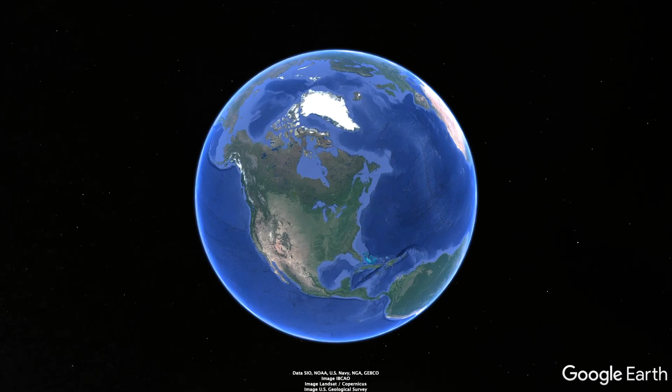I'm standing here today in Alberta's industrial heartland. This is just one of the many places across North America and globally where members of the Canadian Crude Quality Technical Association operate. I'm Dave Murray, Secretary of the CCQTA and Principal Consultant at Omnicon Consultants. Today we're going to take a brief look at the evolution of the CCQTA from its inception into what it is today.

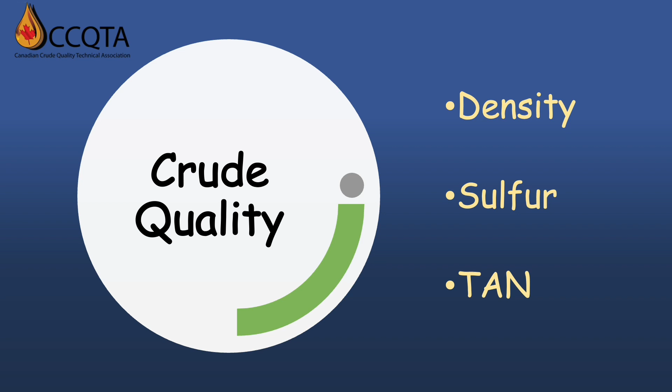Before I get too much further, I should briefly talk about what I mean by crude oil quality. The term crude oil quality likely has many definitions depending on where you are in the crude oil production, transportation, refining, and/or purchasing chain. Three crude oil quality parameters are generally used to determine the value of a crude oil. These are density, sulfur, and TAN, or total acid number. Historically, it has been generally accepted that low sulfur, density and TAN crudes are easier to handle and/or refine, which implies good quality and good value.

Let's look at this from another direction. Broadly stated, quality is the degree to which a product or service meets the expectation of the end user. Processability is loosely defined as any aspect of the production, blending, storage, and/or transportation of crude oil which impacts product handling. In a more practical sense, it is associated with minor changes in crude oil composition, which could be insignificant to one sector, but potentially detrimental to another.

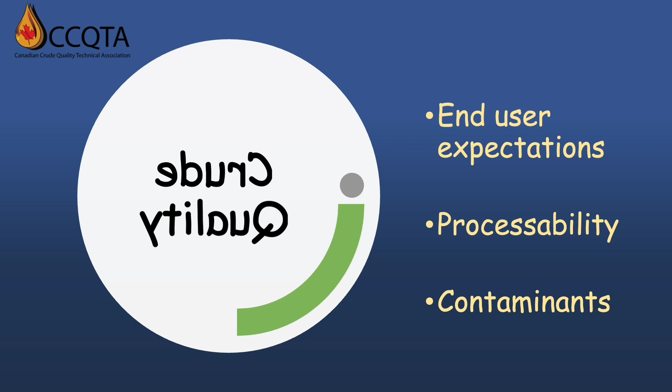Processability issues are often the result of trace-level contaminants of the crude composition. These tend to be relatively low concentration, but they build over time, often resulting in expensive remediation efforts. These contaminants are becoming more and more important in the crude selection process, and they're a key area of focus for the CCQTA.

What factors can impact crude oil processability? Each sector of the industry has their own goals and guidelines when it comes to crude oil handling. A producer will want to ensure that the product meets pipeline specifications. Next, the pipeline must be able to move the product without impacting pipeline integrity or infrastructure such as pumps, meters, and tanks. Unfortunately, some of the practices employed in one sector can have an unwanted effect on the downstream sectors.

For example, while the injection of additives can enhance production, it may also have a negative impact on the refinery receiving the product. Similarly, crude blending into pools can maximize tankage and pipeline utilization. However, some crudes are not compatible with one another, creating blend instability, which can upset or foul downstream units. Let's have a look at the various activities that can impact crude oil received at the refinery.

The first link in the chain is production. Changes in production methods, such as changing from primary to secondary recovery using enhanced oil recovery techniques like CO2 injection, or introduction of new production techniques such as SAGD and/or solvent enhancement. Also, the use of new additives or changes in chemistries and/or the concentration of existing chemistries in use. Also, slop management methods, like is slop being injected back into the sales quality product?

Then we move on to blending. Blending is often done to meet or target established specs. This can include the injection of products like butane, condensate, crude oil, etc., depending on if the desire is to blend up or down in density, sulfur, or TAN.

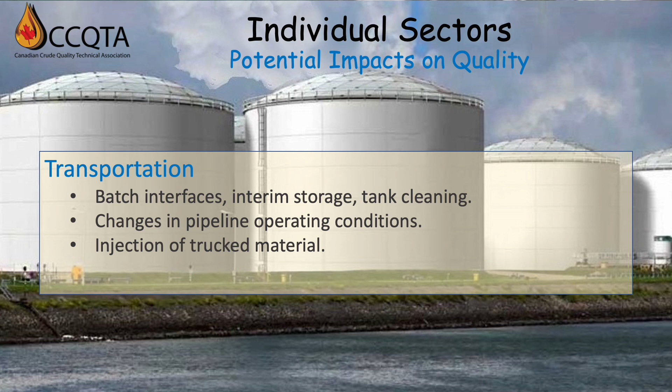Next is waste oil handling. Waste oil is typically treated to remove identified contaminants to meet pipeline specifications, but is not likely to remove all contaminants, especially if they're not known or expected.

And lastly, even refining can contribute to contamination through activities such as on-site blending and storage and slop handling and reprocessing. Ultimately, the refiner needs to know what the molecules will be that are delivered to the refinery, and if those molecules can be turned into finished products such as gasoline, diesel, jet fuel, etc. Any additives or contaminants that are not deemed acceptable in the final finished product may have deleterious effects on either finished product quality or production.

All these factors led to the formation of the CCQTA to provide a technical forum for members of all sectors of the industry. The goal is to have all sectors represented and to work cooperatively together with a common goal of identifying and resolving potential issues related to crude quality.

Within the CCQTA, cross-sector education is a very important aspect of the association's work. It is valuable to get input from someone within the production community when trying to identify a source of contamination in a refinery. Conversely, it is beneficial for production personnel to learn more about refinery sensitivities.

At the same time, it's important for additive suppliers to see both sides and try to balance upstream benefits with downstream impacts. Pipeline involvement is also critical, as they are often the gatekeepers of product specifications as a transportation link between production and refining.

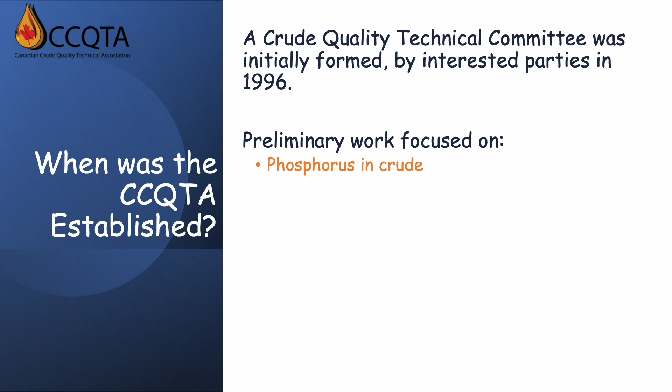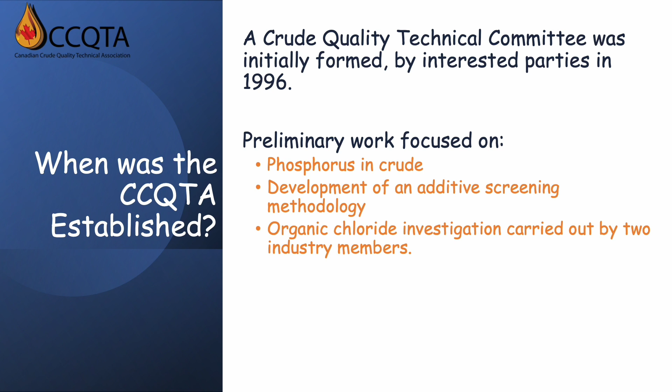In 1996, an industry-based crude quality technical committee was established to discuss common crude quality issues. At that time, 3 key projects were in progress, including a refinery issue with phosphorus fouling, which had surfaced in 1995. Next, the development of an additive screening methodology. And lastly, an organic chloride investigation carried out by 2 industry members. In 1997, the Ad Hoc Industry Committee was formalized as an association under the Societies Act of Alberta, and the CCQTA was born.

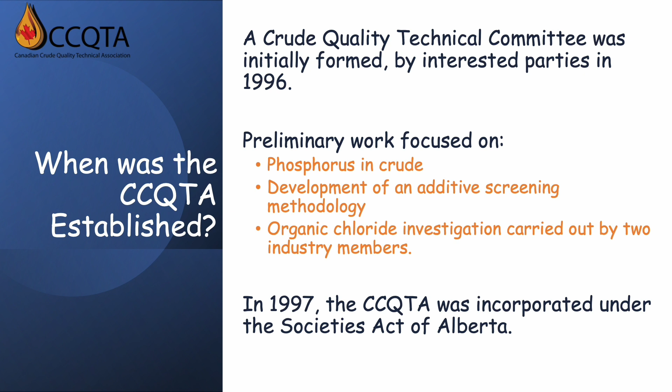These are the guidelines that the CCQTA operates under. Operations are governed by our bylaws under the Societies Act of Alberta. The membership is represented by 8 sectors of the oil and gas industry, including producers, refiners, midstream, transmission pipelines, additive suppliers, government agencies, industry services, and international members.

As a strictly technical association, we do not permit discussion related to trade, pricing, or financial transactions, etc., based on our antitrust guidelines. The association was originally structured to facilitate participant-funded projects. However, now the majority of our projects are CCQTA sponsored. All the activities of the association are funded via annual membership fees.

What kind of people make up the CCQTA membership? The CCQTA is comprised of members from diverse technical backgrounds. This includes engineers, chemists, technologists, researchers, operations and logistics personnel, government and regulatory staff, technical sales, and that's just to name a few.

Between 1997 and 2015, the association simply functioned as a vehicle for members to propose group-funded JIPs. Some projects had only 2 or 3 participants, while others involved over 20 member companies. All of the data and results initially belonged to the participants, with the understanding that reports would eventually be made available to all CCQTA's members 5 years after the projects were closed.

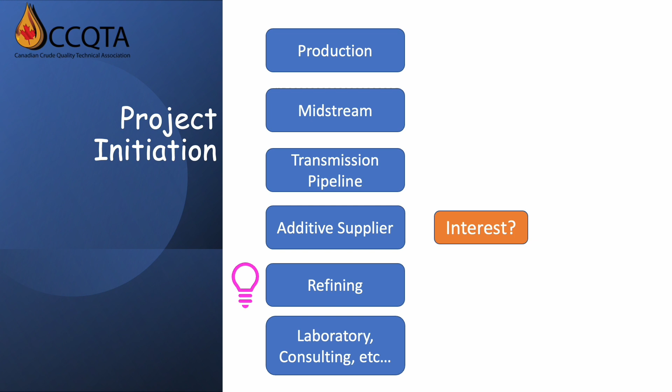Members can bring any project idea to the association. For example, a refiner may have an issue with fouling and deposition that they suspect might be related to their feed. They present their concerns to the group during an open forum meeting, looking for interest in launching a project. Members from the various sectors express their interest. If there is sufficient interest in the topic, then a project is initiated, a project manager is selected, work is planned,

and budgets are developed. The funding structure for a project is dependent on the level of interest amongst the various sectors. If there is widespread interest across the various sectors, the project will be sponsored by the association. If the project is very narrowly focused between only a few sectors, then the project may be initiated as participant only and operated independently.

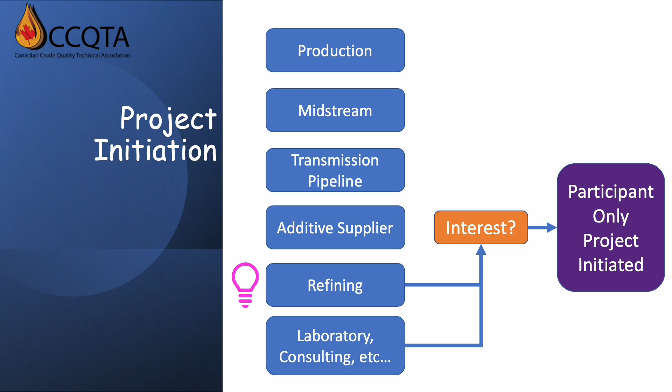Having spent 33 years of my career, all of my career working in the downstream in the refineries, providing support for desalting and corrosion control, like Andre, the one challenge that we had is we're very myopic. We live inside the gates of the refinery and don't have a good sense of what the quality of the feedstock is coming down the pipe. We just receive it and it's problematic and we don't know why, we don't know how.

CCQTA to me provides me with that link of how I can try to better understand what's coming down from production, from pipeline and transportation, and how that impacts the refinery, which allows us to better implement our solutions to help the refiner have smoother operations. And that's the first thing it is to me.

The second thing to me is the atmosphere of CCQTA. I've gone to a lot of conferences and you get a lot of advertising, a lot of marketing, a lot of show and tell, a lot of people promoting themselves in the business. When we have these get-togethers, it's a lot of really smart people that just want to talk about the technical issues, communicate back and forth, help each other understand, and build our collective knowledge so that we can improve the quality of the feedstock that comes down the pipe out of the ground into the refineries.

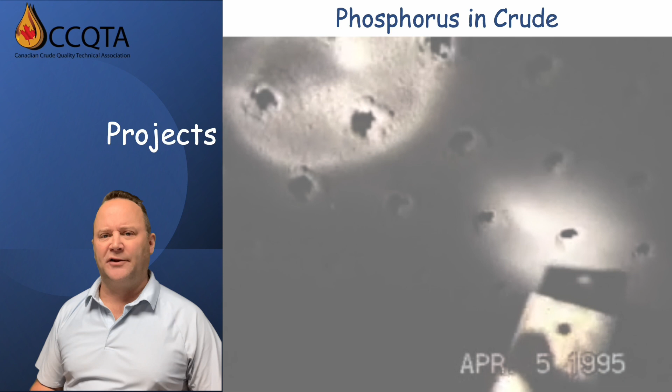As I've mentioned, the CCQTA has worked on many projects over the years. I'm going to highlight a few of our projects that have had a significant impact on the industry. Let's start with the phosphorus in crude project that launched the CCQTA. Phosphorus fouling began to surface in Canadian refineries in the mid-1990s due to the use of dialkyl phosphate ester gellants in hydraulic fracturing operations. When DAPE enters the atmospheric crude tower of a refinery, they result in fouling within a narrow temperature range.

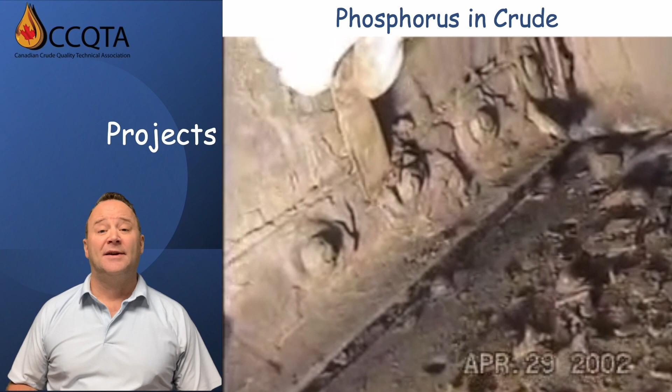These 1995 and 2002 videos taken inside primary and secondary crude distillation towers highlight the level of fouling caused by phosphorus. The holes shown have a normal diameter of 1/2 inch, which in many cases are reduced to 1/4 inch or less, which severely limited the throughput, resulting in unplanned shutdowns. From 1995 to 2005, the CCQTA conducted extensive root cause analysis, method development, sampling and testing work, and determined that DAPE was the cause of fouling and identified several sources where they were entering the crude network.

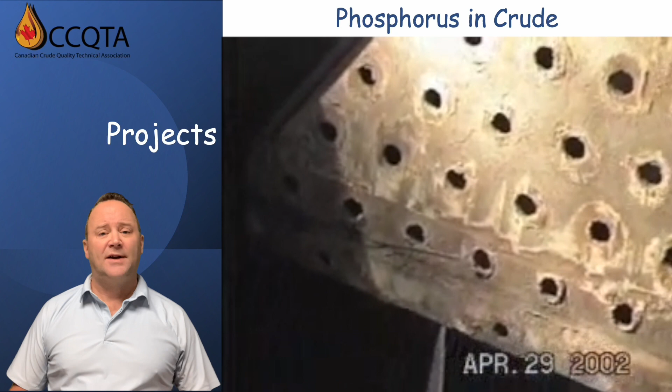Based on this work, in 2005, the Canadian Association of Petroleum Producers, or CAPP, implemented a specification to limit the amount of volatile phosphorus permitted in sales quality crudes to 0.5 ppm by mass. Combined with new product development work by additive suppliers, phosphorus-linked fouling issues began to subside during the mid-2010s, both in Canadian and U.S. refineries. However, in recent years, phosphorus fouling issues have resurfaced in a different temperature range, and the CCQTA is now actively working on identifying the source. Now let's look at the oil sands bitumen processability project.

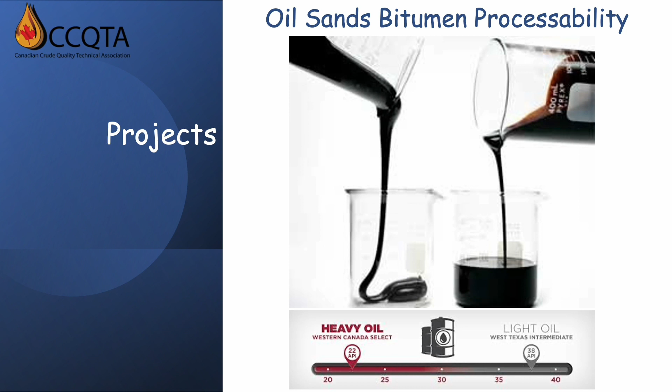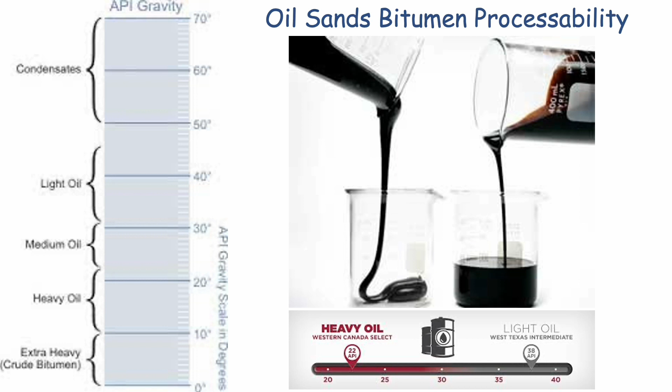In 2006, the CCQTA launched this project to assess potential refinery processability issues with the newly developed Alberta dilbits and synbits. U.S. refiners, based on historical challenges running conventional Canadian heavies, were concerned about processing these newer, heavier products. Detailed project work involving refiners, producers, and chemical suppliers ultimately determined that the processing issues would be minor, which facilitated the acceptance of dilbit products into the U.S.

market. In 2012, some of the project data was provided to the National Academy of Sciences in their investigation into the impact of diluted bitumen on pipelines.

Hello, I'm Keith Lawson. I'm the Director of International Members, and I'd just like to talk about the Oil Sands Bitumen Processability Project, and that was managed by the CCQTA, and we found it really valuable because we were battling with the acceptance of these newly arrived synbit and dilbit crudes. And we managed to do that, and some very specific concerns about how they caused fouling and how they corroded in crude towers were put to rest.

Next, we'll take a look at vapor pressure and light ends. This project was initiated in 2013, primarily due to conflicts between measured vapor pressure data and the API nomograph conversions from RVP that were used for EPA tank emission calculations. A significant volume of data was presented comparing the prominent ASTM D323 RVP method versus the newer ASTM D6377 method.

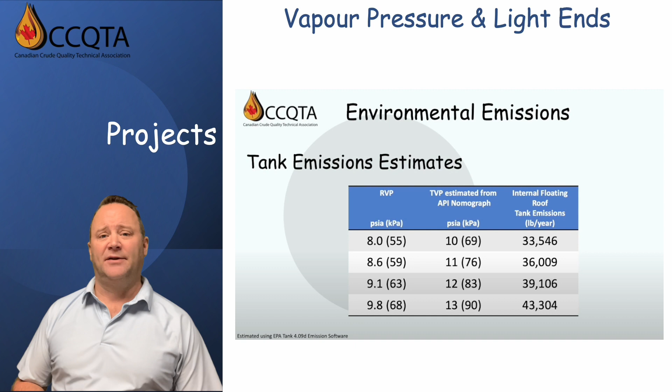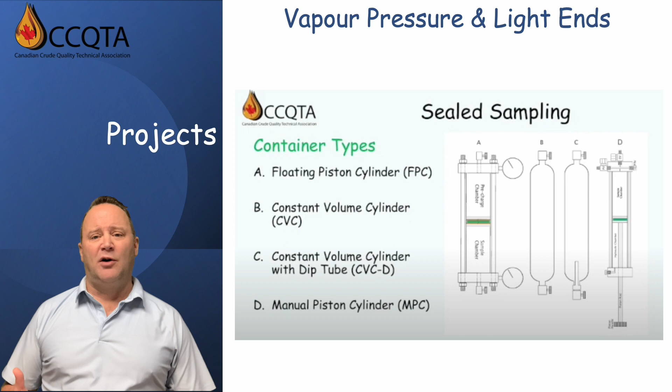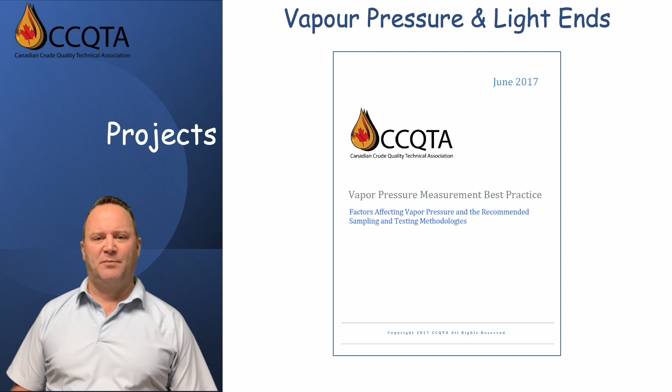In the end, the project work extended out well beyond test method comparison into the impact of sampling methods, as well as the methods used for compositional analysis. Overall, between 2014 and 2018, this project spawned 2 ASTM test methods plus 2 ASTM standard practices. In 2017, the CCQTA also published a vapor pressure best practice summarizing the project findings. And in 2021, released 2 educational videos.

Based on the findings of this project, the industry has also moved away from the legacy ASTM D323 method and adopted the more accurate ASTM D6377 method.

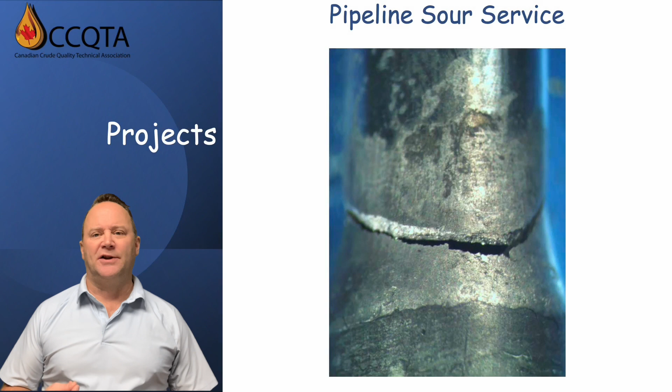And lastly, we come to pipeline sour service. This project was initiated in response to regulatory changes in how pipelines were designated for sour or non-sour service, meaning H2S or non-H2S, and specifically related to sulfide stress cracking. Prior to 2007, CSA Z662 included a sour service exclusion for transmission pipelines based on a pre-2003 version of NACE MR0175. In 2003, MR0175 was harmonized with ISO 15156, and the exclusion clause was removed.

Subsequently, when CSA published an update to Z662 in 2007, it also harmonized with MR0175 and removed the exclusion clause for transmission pipelines. This left the transmission pipeline community in a very difficult position with hundreds of thousands of kilometers of pipelines that were not built for sour service.

In 2015, the CCQTA undertook to assist the industry, which had been struggling to find a solution to this regulatory problem. A significant amount of monitoring and physical test work was performed to show that SSC is not possible under the conditions that a transmission pipeline operates, as well as to provide a scientific basis for that argument. In the end, a large amount of operational data was provided by the major pipelines, showing that in 70 years of operating history, no transmission pipeline has ever experienced sulfide stress cracking.

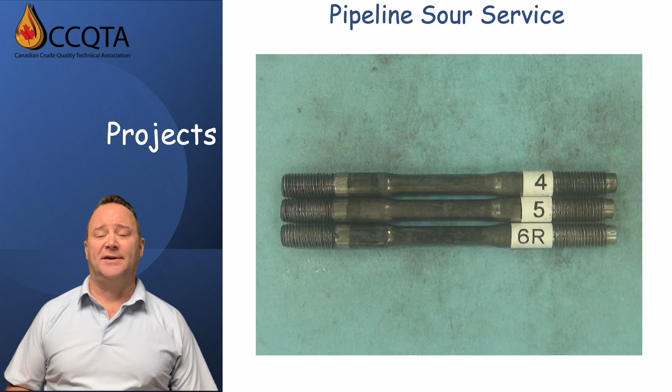This data was presented to the MR0175 maintenance panel with recommendations to revise the standard with an exclusion for transmission pipelines. In 2021, ISO 15156 and NACE MR0175 was revised with the requested exclusion in place. Currently, the requested revision to CSA Z662 is in progress.

I'm Ashutosh Garga, and I'm the CCQTA Director for Alberta Energy. Over the years, the department's continued participation in the association has provided three main benefits. Number one, it has enhanced our understanding of crude quality issues for the transportation of Alberta's crude oils. Number two, it has enhanced our knowledge of the technical merits of the oil sands industry's ability to undertake value-added investments. And three, it has provided valuable input to help support one of the department's key priorities, to pursue and advocate for increased market access for Alberta's energy products.

We have also received tremendous benefit from specific CCQTA projects. For example, both the bitumen dewatering and total acid number projects helped us identify key considerations for assessing Alberta Energy's oil sands policies and regulations governing oil sands royalty collection. Membership in the CCQTA has been an asset to our department's work.